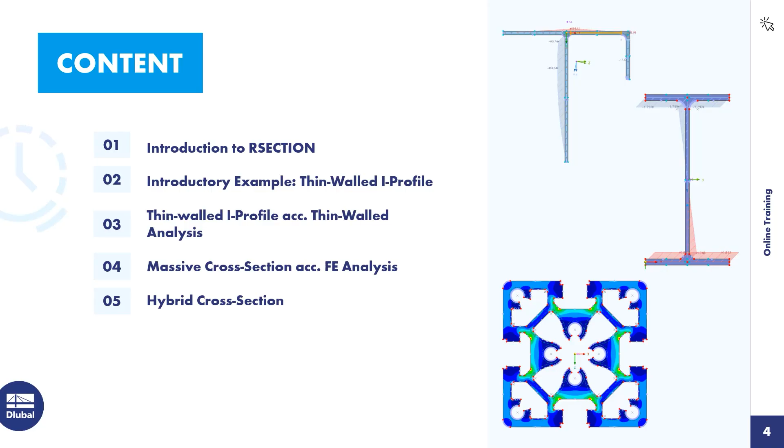Then I open RSECTION.

RSECTION is an independently executable program for generating any thin-walled or massive profile. If you want to design special profiles in RFEM or RStab that are not contained in the profile library, you can create them with RSECTION. You can then import these user-defined profiles into RFEM or RStab.

In RSECTION, it's possible to calculate cross-section values and stresses. The RSECTION user interface is the same as in RFEM 6 or RStab 9. The cross-section graphics and dialogues are displayed in the working window here in the middle. Most tasks can be performed with a mouse. In the tables below, the keyboard is primarily used for numeric input and output of results.

There are three navigators in the left pane of the working window: the navigator data, the navigator display, and the navigator results. The data navigator manages the input data. A double click on the corresponding entry opens the dialog in which the selected object can be changed.

However, it's also possible to create new objects via the navigator data. Just right-click on the object and choose, for example, new point, and then you can enter the point properties.

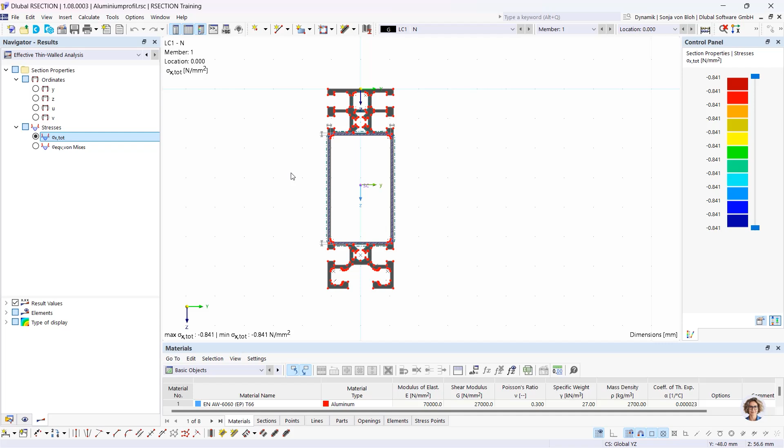Then I would like to go into the mouse function. To move the section, you can hold down the mouse wheel and move the section accordingly. You can turn the mouse wheel to zoom, and right-click to open the context menu.

You can also select objects with the mouse. If you open a window from left to right, everything that's completely within the selection area will be selected. If you drag a window from right to left, everything that is intersected by the selection area will be selected.

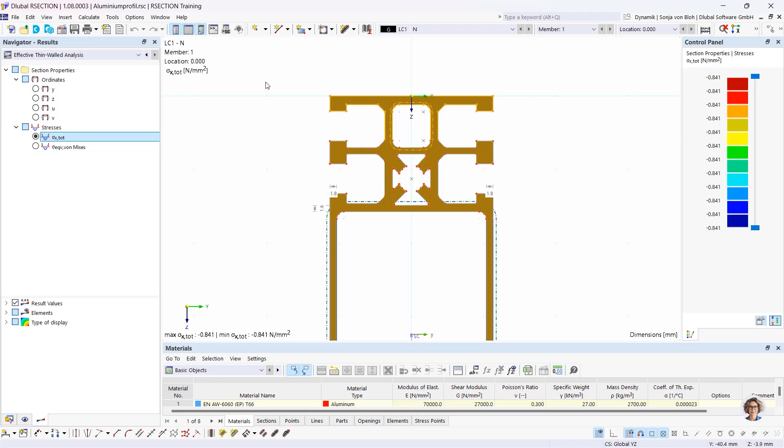You can also select individual objects. To do this, left-click on the objects that you want to select. If you want to add objects to the selection, hold down the Control key and then left-click on the corresponding objects. If you want to remove objects from the selection, hold down the Shift key and click on the objects.

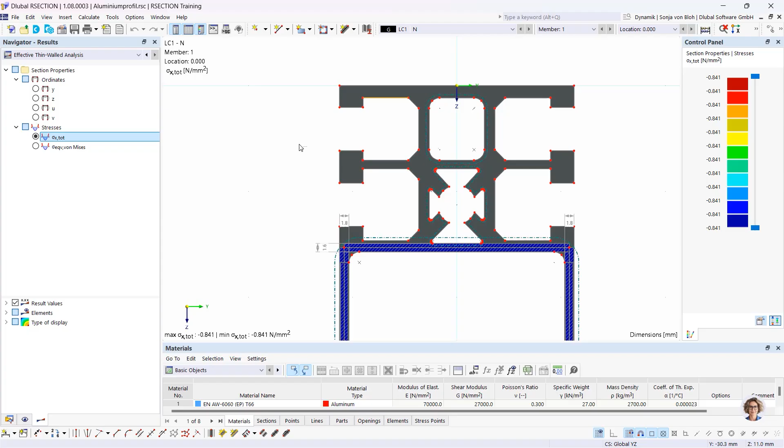This brings me to the first example. To create a custom profile, open the new model window via this button here. First, I have to enter the cross-section name. I name it example 1. Then I have to define the analysis method.

We have two analysis methods available: a finite element analysis and the thin wall analysis. I choose here the thin wall analysis.

It's also possible to calculate the effective cross-section. For this, it's necessary to activate this add-on. The effective cross-section can be calculated for both analysis methods. After activating this add-on, a standard must be selected according to whose rules the subpanels are to be generated and the effective cross-section is to be calculated.

The following standards are currently available: Eurocode 3 Part 1.1, Eurocode 3 Part 1.3 for cold formed cross-sections, and Eurocode 9 for aluminum cross-sections. I choose here the Eurocode 3 Part 1.1.

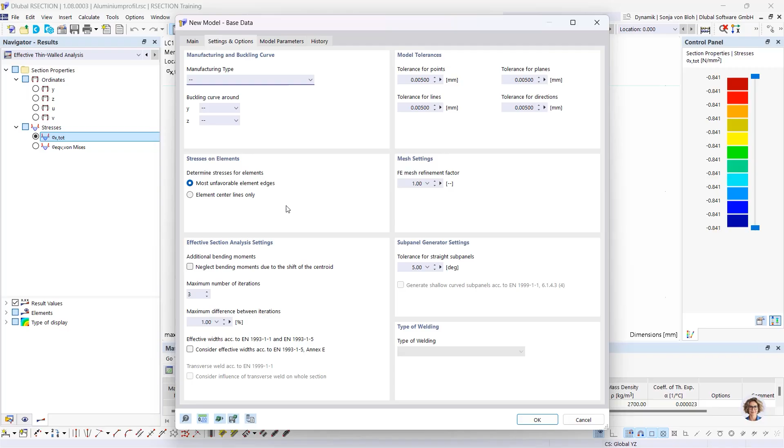I don't want to define here the manufacturing type, so I click on OK. Then the new file will be created.

I first define the material. A material is already defined, so I double click on this material to open the Edit Material dialog. Here in the list on the left, it's possible to add a new material. It's also possible to copy a selected material or to delete a material.

It's possible to enter the material name directly here in this field. Here I enter, for example, an S235, and now RSECTION lists all materials that match that name.

But I can also open the material library via this button here for a specific selection. The material library filters are available to quickly find the material. You can filter here, for example, by material name, steel, for example, and you can filter by a standard.

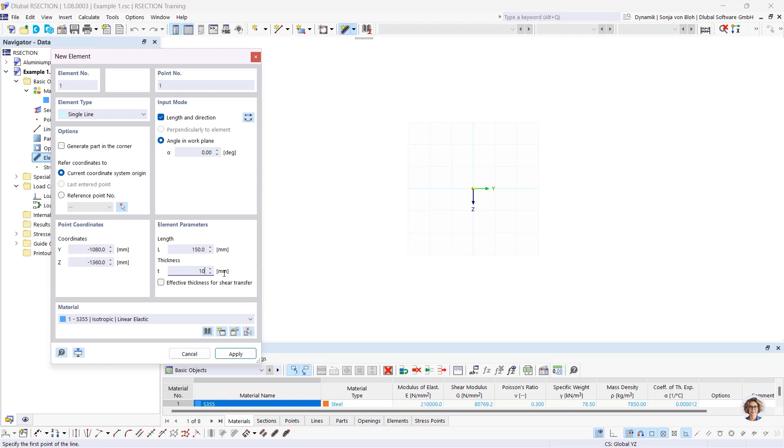I'll enter the bottom flange here first. The bottom flange has a length of 150 millimeters and a thickness of 10.7 millimeter. You can see here a preview of the element, and to create the element, I choose the desired location, and then I left click with my mouse.

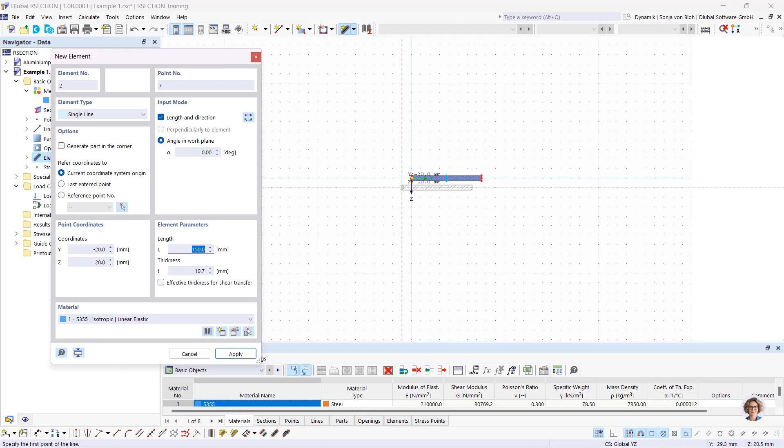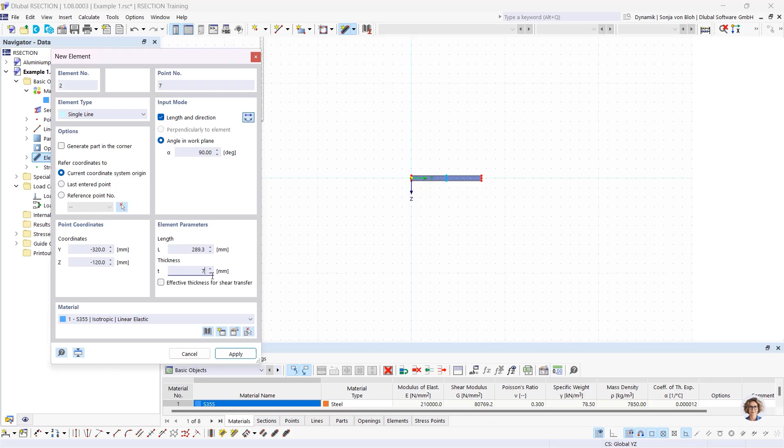Then I define the web. For this I reverse here the orientation, and the web has an angle in the work plane of about 90 degrees and a length of about 289.3 millimeters and a thickness of 7.1 millimeter. And then I put this web here in the middle of the first element.

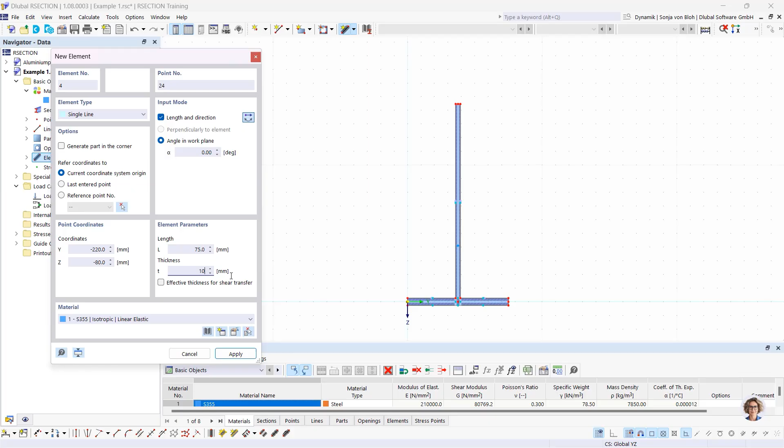Then I create here the upper flange. So I define an angle in the work plane of 0 degree. Length is 75 millimeter. Thickness is 10.7 millimeter. And I choose here this point. Then I reverse the orientation to create the second part, and then I place this here, and with a right mouse click I leave the window.

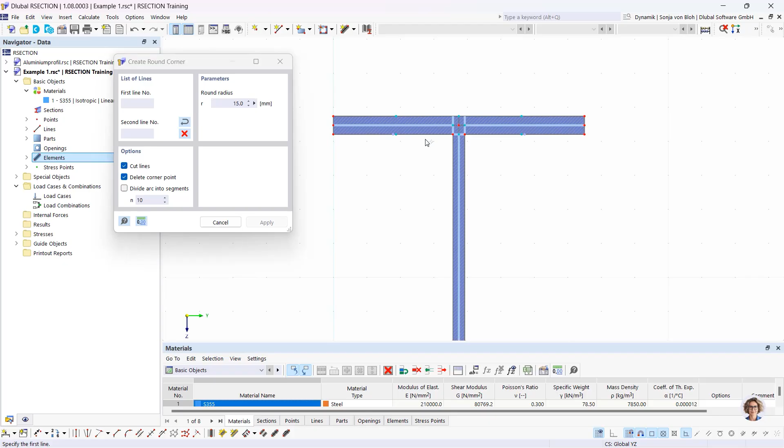The profile should be a rolled T profile to which a lower flange is welded. I want to also define here the round radius. So I can define lines to create this round radius, or we have also a function called create round corner, and you find the corresponding button at the bottom. Then you have to define the round radius. This should be 15 millimeters, and all I have to do is click on the relevant lines. Right mouse click to leave the dialog.

Then I want to define the welds. The lower flange is welded with a 6 millimeter double fillet weld, and I create the welds using the create angled corner function. Here you have two corner types. You can define the corner via both edges or via edges and angle, and I choose edge and angle.

It's also possible to calculate in the dialogues, so I define here for the length 6 multiplied by square root of 2, and then I have to define the angle. It's 45 degrees, and click on the relevant lines.

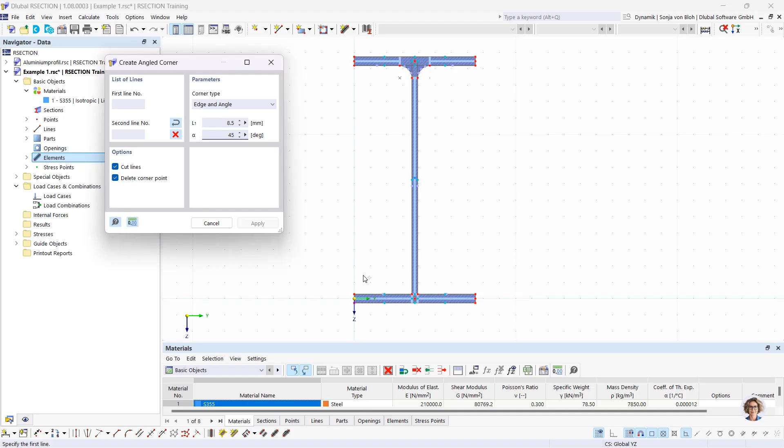What you can now see here, these are the subpanels, and these subpanels are automatically generated based on the standard selected in the base data. If no elements are defined, a cross-section classification in RSECTION and in the design modules of RFEM or RSTAB is not possible.

And neither a calculation of the effective cross-section is possible. In the design add-ons, this profile is then designed according to cross-section class 3. I would also like to use this example to show you how to calculate stresses and the effective cross-section.

In order to calculate stresses or the effective cross-section, a load case must first be created. Load combinations can also be formed.

So I create a load case first via the navigator data. Here I go to load case, new load case. I name this load case N, and I want an additional load case, so I create a new one and name it MY.

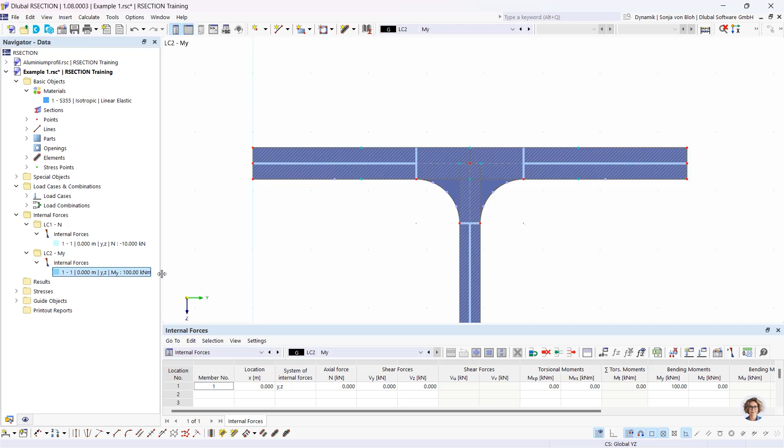The dots that you see now in the graphics are the stress points. Stresses are calculated and displayed at the stress points. The stress points are generated automatically, but I can also define them manually.

I want to define the stress points manually, so I go to the navigator data and open the stress points. These are the automatically generated stress points, and I want to add a new one, so I choose this option. The stress point should have the number 100, and then I have to define the coordinates.

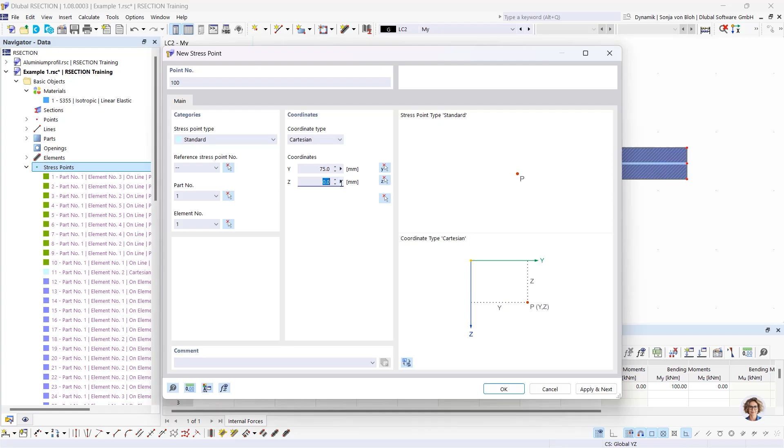I can define the coordinates manually, or I can select a point in the graphics and import its coordinates. I want to define it manually: 75 millimeter and minus 100 millimeter. Then I click OK.

Now the stress point is created. We can see the stress point here in the graphics. It's also possible to show the numbering. For this, I go to the navigator display and activate this checkbox for numbering, and we also have a checkbox for the stress points. Now you see the stress point number 100.

I deactivate this again. Which stresses are to be calculated and output in tabular and graphical form can be set in the stress configuration. I want to show you this now. For this, I go to the navigator data, and under stresses, stress configuration, I find the stress configuration. The corresponding control fields are to be activated or deactivated here.

Now only sigma x total, tau total, and equivalent stress will be calculated. That's okay in this case. So I start the calculation now.

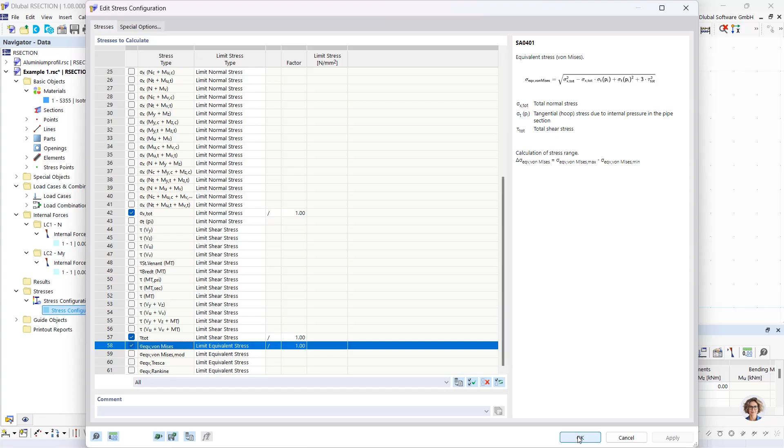In the results navigator, you can switch between the results of the gross cross-section, which are the thin-walled analysis results, and the results of the effective thin-walled analysis calculation. I show here the results of the gross cross-section first.

The same possibilities are included in the tables. Here you can switch between the results of the gross cross-section and the effective cross-section. I choose here the results of the gross cross-section.

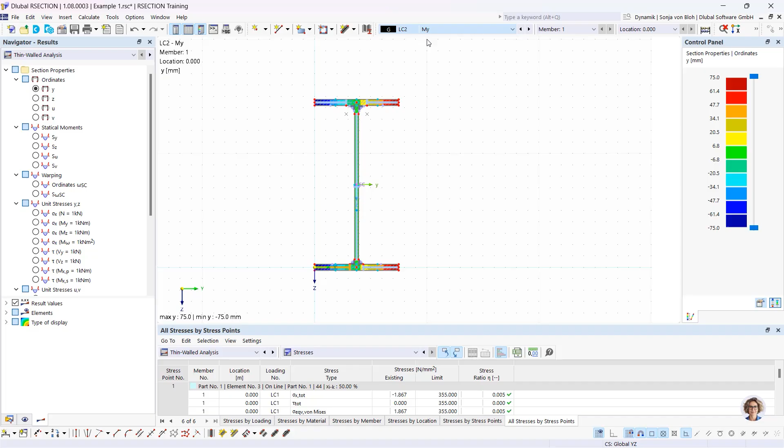It's also possible to switch between the results of the load cases and the load combination. I look at load case 1 first, and I want to see the stresses for load case number 1 for my axial force. It's also possible to change the type of display.

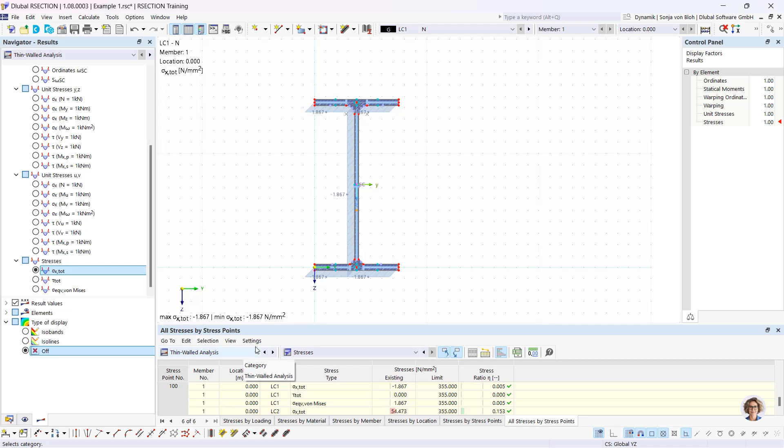I choose here off. And if you want to see the stresses on the stress points that we created, you can go to this table, open the tab all stresses by stress points, and if you choose this stress point, you go directly to the stress point in the table.

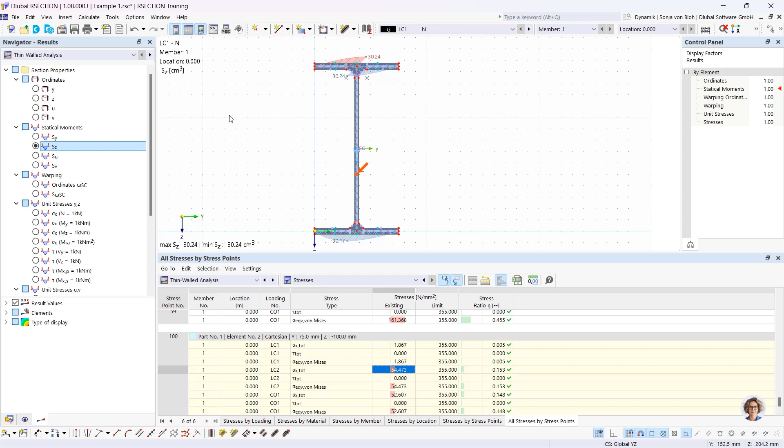It's also possible to show the statical moments as Sy, Sz and so on. We have the statical moments also in the table. Here, statical moments and warping.

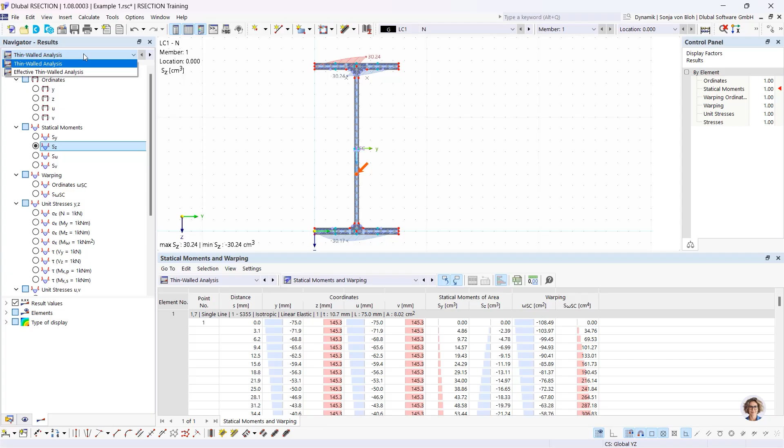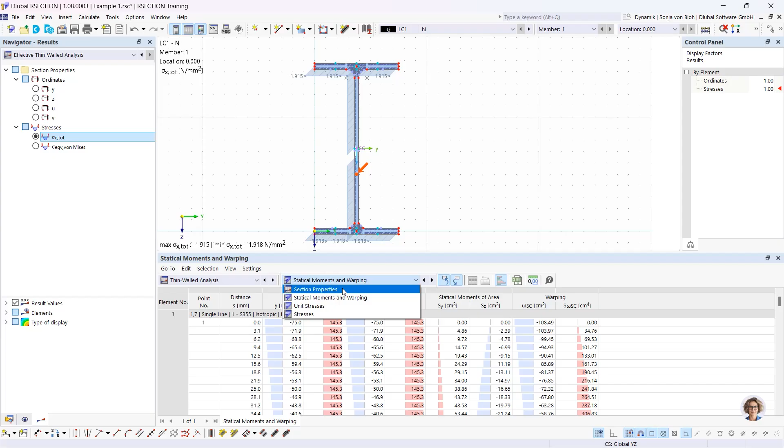I want to go to the effective cross-section results now. So I change here in the navigator results to effective thin-walled analysis, and I want to see here the stresses for load case number 1. I change this here also in the table. You see here the section property of the effective cross-section in comparison to the section properties of the gross cross-section. The section property of the effective cross-section are reduced.

You can see here graphically that in load case number 1, the web falls into cross-section class 4. Local buckling occurs in class 4 cross-section. According to the standard, the reduction in strength due to local buckling can be taken into account through effective widths, and this is calculated automatically here in RSECTION.

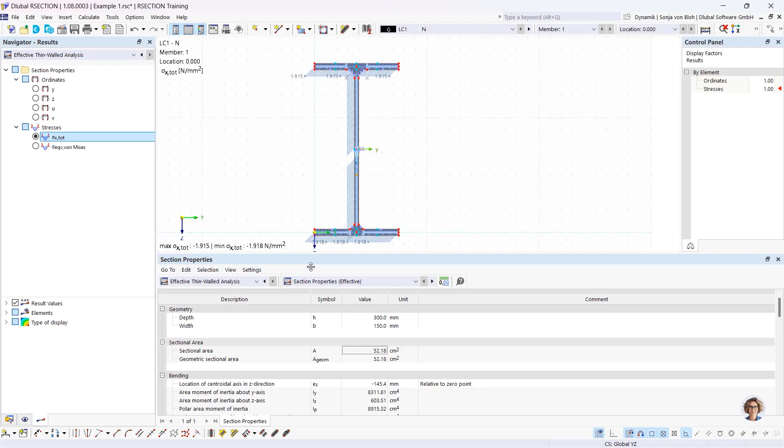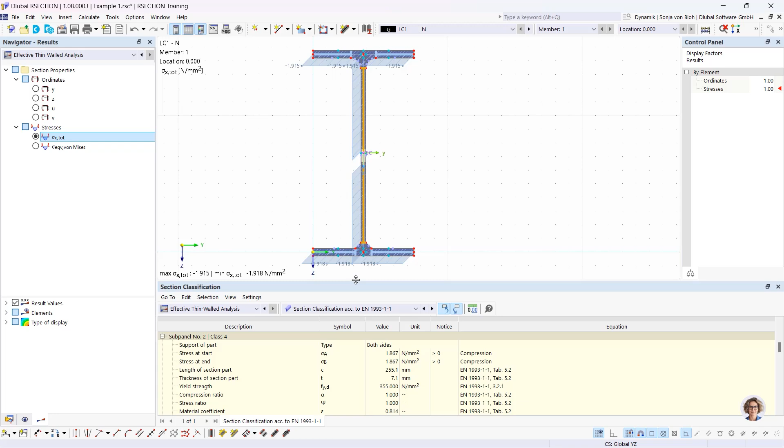You can see here the section classification also in the table. You see here, okay, classification, this cross-section falls into class 4. And if you click on the subpanel of the web, you see here the details of the classification. It's also possible to see here the effective width of this subpanel.

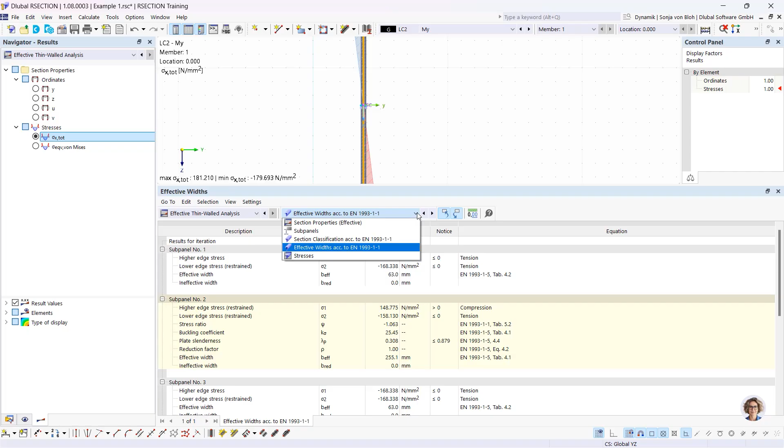Here if I switch to the bending moment and go here to the section classification, you can see this cross-section falls into class 1, so no reduction has to be made. And for the combination, I see that this cross-section falls also in class 1.

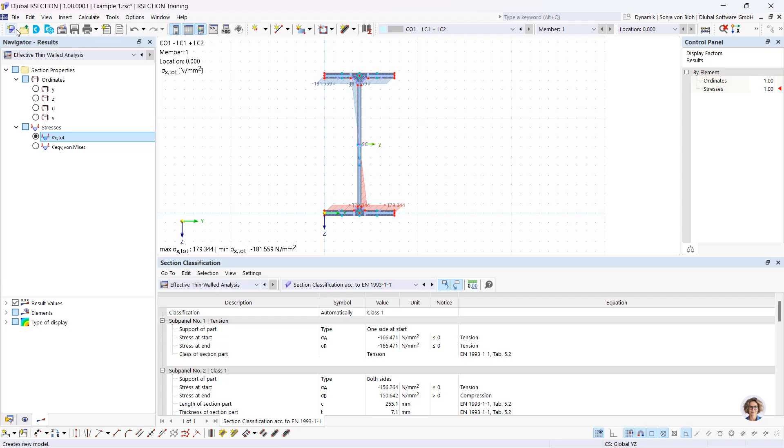I would now like to use another example to show you how you can access cross-sections from the library and modify them. For this, I create a new file via this button. I call it example 2. Here I choose the analysis method thin-walled analysis, and I want to calculate also the effective cross-section. So I activate this checkbox and I choose the standard Eurocode 3 part 1-1. And then I click on OK to create this file.

I then define the material. This should be in S235. So I open here the material library. I type the material name S235 from this standard. OK.

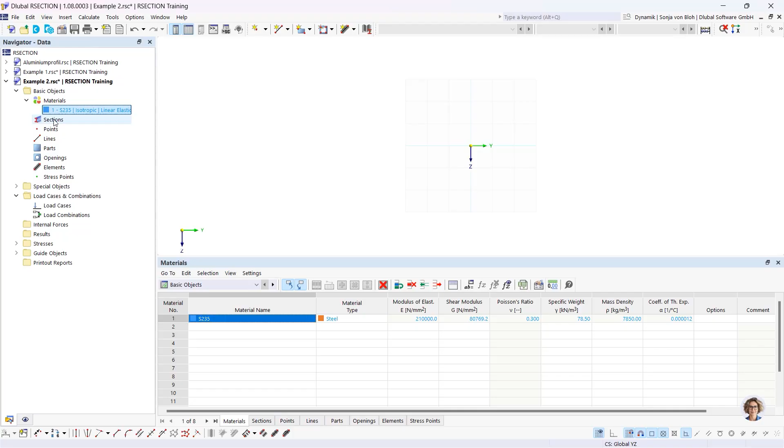And then I insert a cross-section from the cross-section library. To do this, I go here to the navigator data and open here the window new section. The window is structured like the material window. A cross-section can be created or copied via the list here, via these buttons. I can enter also here the cross-section name, for example, IPE 200.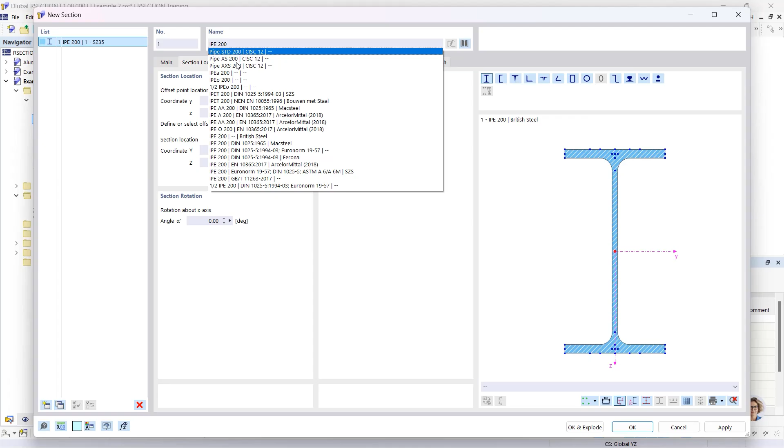But it's also possible to open the cross-section library via this button. A large number of profiles have already been entered into the profile library, and I want to choose here a standardized L profile, and the name is L200 150 12. I choose here the standard, then I click on OK.

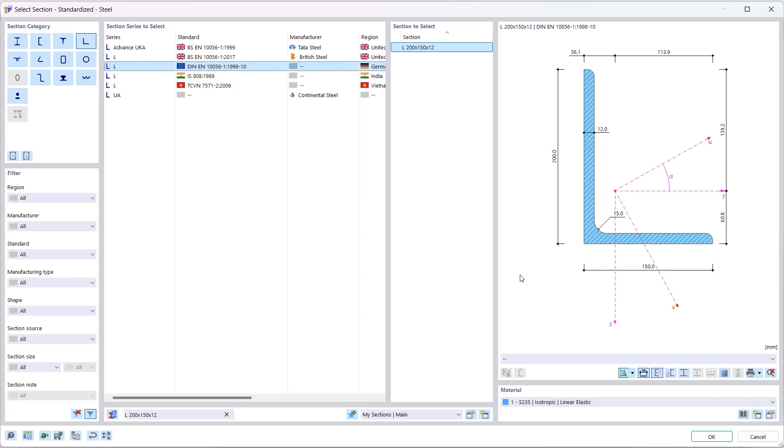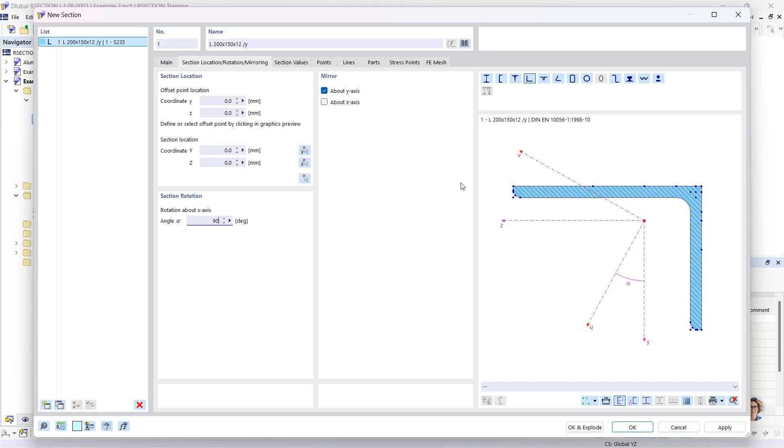The angle should be mirrored around the y-axis, so I activate this checkbox, and the angle should be also rotated about the x-axis, about 90 degrees. Furthermore, I select the offset point in the graphic, and at this point the profile is placed at the insertion point. I pick for this point here, and then I define the insertion point. I can pick this also graphically here in the working window, and then I click on OK.

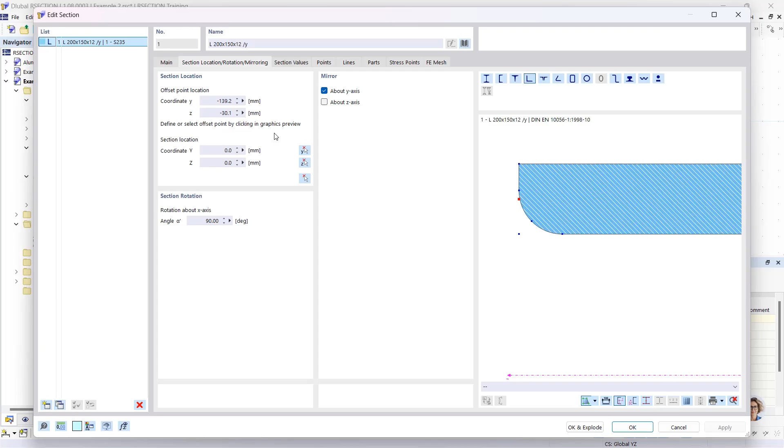When inserting this thin-walled cross-section, two elements are defined and one part will be created. The cross-section can be subsequently edited, moved, mirrored, or rotated. You can open here this dialog, or you can use here this function for move, copy, or rotate and so on. However, in order to modify individual objects such as points or lines, the cross-section must be split. The cross-section is to be supplemented by further cross-section parts.

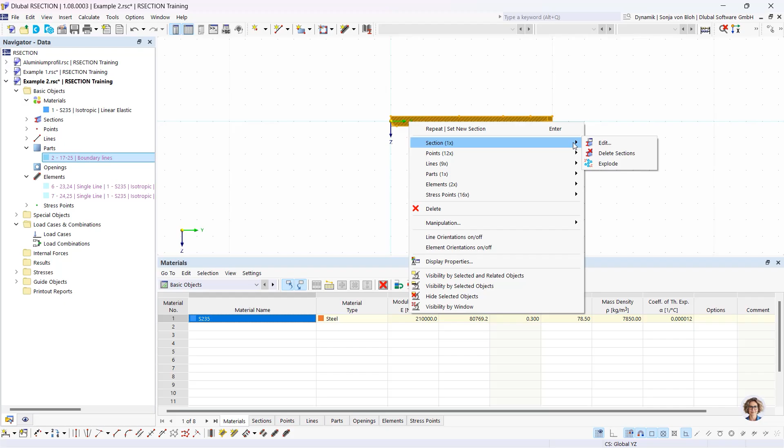I therefore split the cross-section into its individual parts for further processing. To do this, I right-click on this section, and then I choose here Explode. The fillet isn't needed, so I delete this. So I choose here this point and click on delete. Now the part is deleted too.

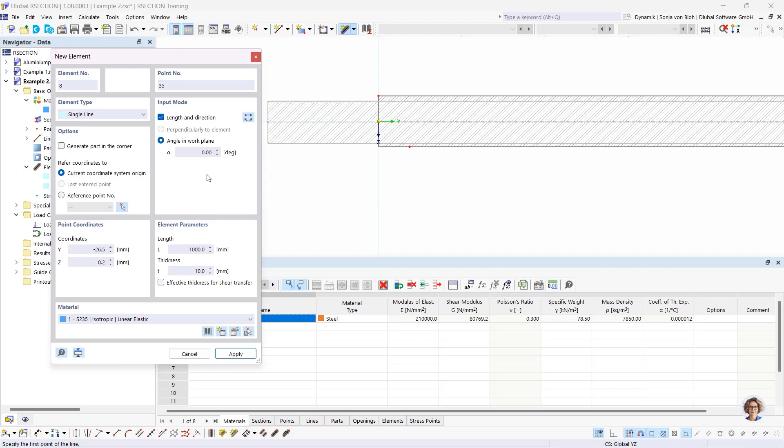I also add more elements. I insert an element with a thickness of 12 millimeter and a length of 200 millimeter, and I will do this via the graphical input. Here I choose single. I choose the input mode length and direction, and I reverse the orientation, and the length should be 200 millimeter, thickness is 12 millimeter, and then I put this element here.

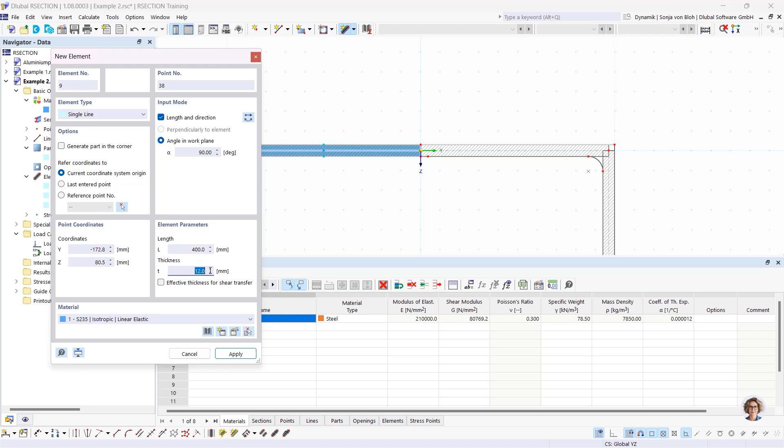I want to add another element for the web with a thickness of 10 millimeter and a length of 400 millimeter. For this, I define here an angle on the work plane. I have to reverse the orientation. Length should be 400 millimeter, thickness 10 millimeter, and I create this element on this position.

I now delete unnecessary lines. I don't need this line, and I also don't need this line. And welding seams should also be taken into account.

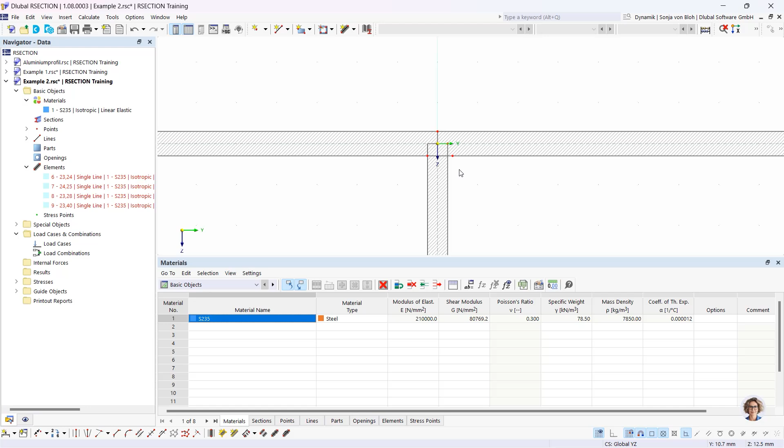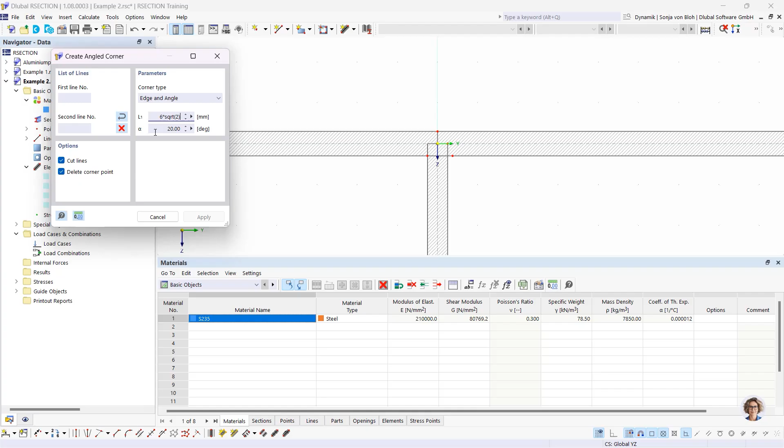So I create the welds using the function create angled corner. Here I use the corner type edge and angle, and a double fillet weld is to be defined, so that I define here 6 multiplied by square root of 2 with an angle of 45 degrees. And I define it here on these positions.

Furthermore, I still have to create the part by selecting here this function select boundary. Here I have to choose the material, and then I click on the line, and now the part is created automatically.

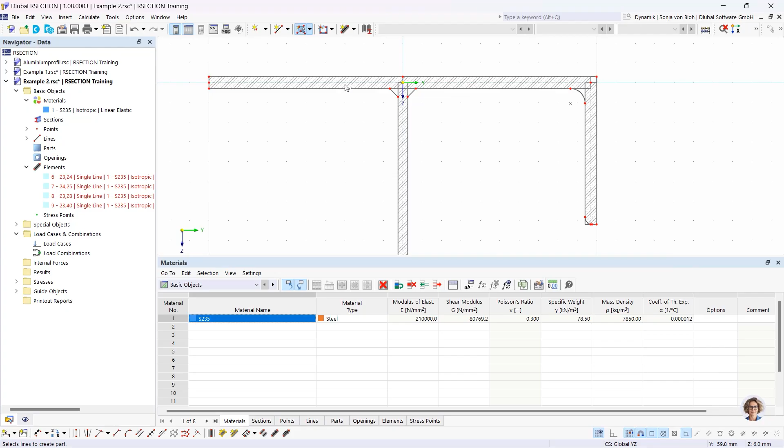I would now like to calculate the effective cross-section and the stresses, so that I create a new load case. So for this I create a new load case. I call this load case N, and a second load case My. I want to create also a load combination with N plus My, and I click on OK.

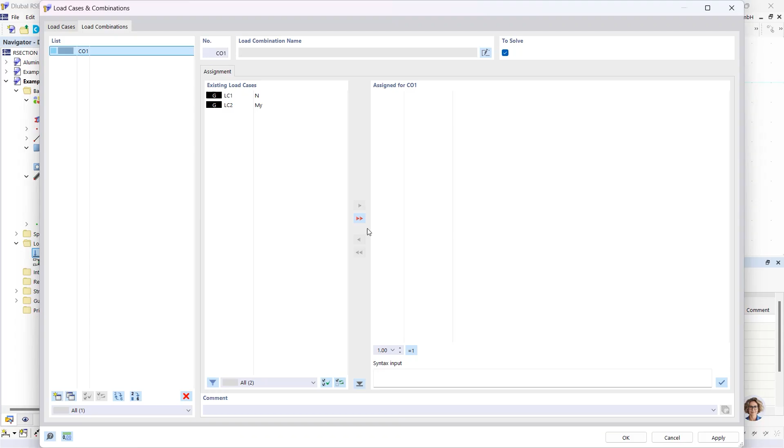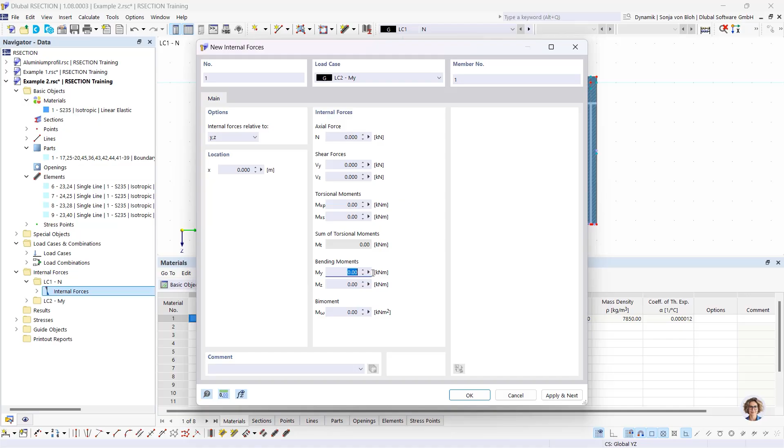Then I have to define the internal forces. For this I open here the internal forces, and in load case number 1 I create an internal force of -50 kilonewton, apply, next, change the load case. Here axial force should be 0 and My should be 20 kilonewton meter. Then I click on OK. I start the calculation now.

I look at the effective result of the effective cross section. For load case number 1, I see a reduction in the web and in the flange. Looking at the section classification, you can see this cross section falls into class 4 for load case number 1, and also for load case number 2, but here only the flange is reduced.

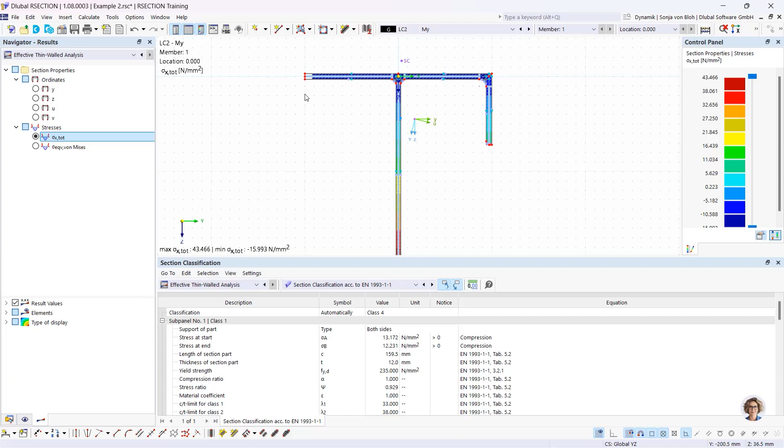We can change the type of display to off, and then we look to the classification of the load combination, and also for the load combination this cross section falls into class 4.

I want to create the documentation now, and this is done in the printout report. For this I go to the navigator data again, and here I create the new printout report.

Here I can choose the report items that should be included in the printout report. I don't want to have the stresses by loading and material and so on. So I click now on Save and Show.

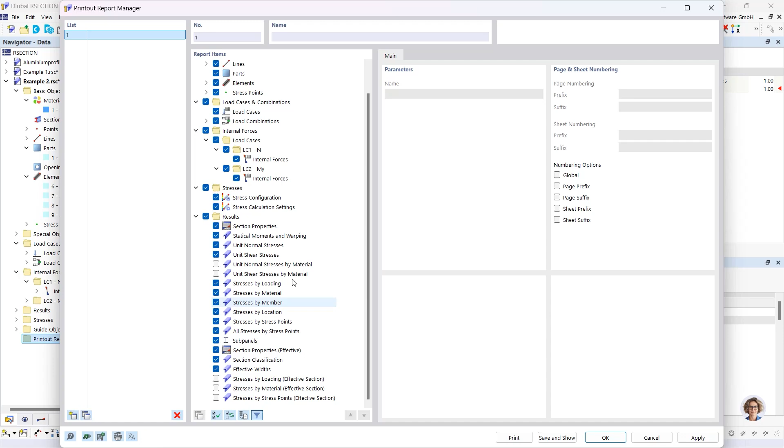Now the printout is created. We have here the tables that we have chosen in this printout report manager, and it's also possible to print a graphic to this printout report.

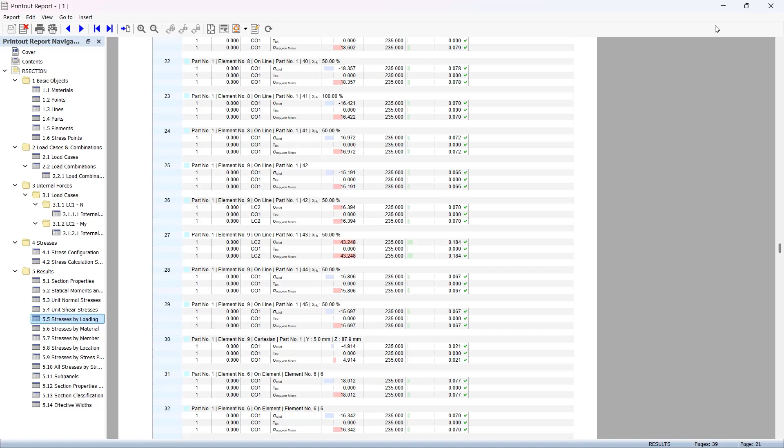I want to show you this now. To print this graphic to the printout report, I choose this function: print graphics to the printout report. Here you have the possibility to make various settings. You can define the graphic printed so that it's window filling, and you see this in the preview.

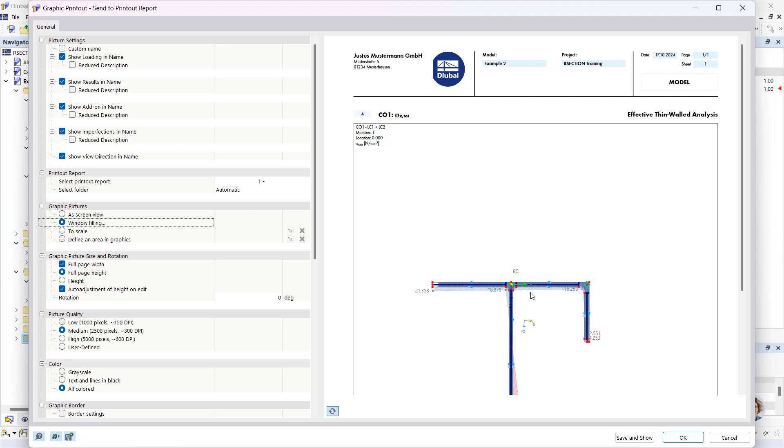Then I go to save and show, and now this graphic is printed to the printout report.

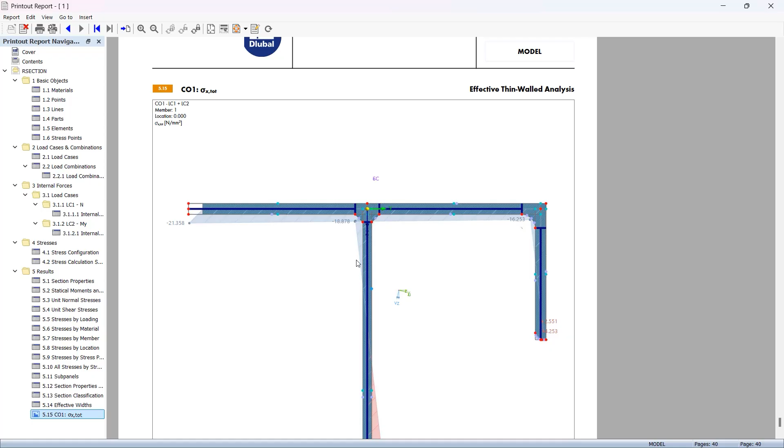In the next example, I would like to show you that you can also create cross-sections by importing a DXF file. Now I close this printout.

A DXF file can be imported via menu File, Import DXF. Then I choose the corresponding DXF file and click on Open. I don't want to import this DXF file into the active model. I want to create a new model, so I click on No.

In the section Create RSECTION Model, you have 3 options for creating the cross-section. The automatic creation of elements is useful if the outlines of the cross-section are available in the DXF file. RSECTION attempts to create center lines for parallel lines and then set the elements between the intersections. Only elements that do not exceed the maximum thickness defined in this maximum thickness field are created.

The import function use DXF template lines as center lines is useful if the cross-section geometry is available as a center line model. The lines of the DXF template are considered as the center lines of the elements. The thickness defined here in this field T is assigned equally to all elements.

The function create DXF template is useful for massive cross-sections where no elements need to be created. In addition, this function can also be used for complex cross-sections where I only want to create elements for the decisive cross-section parts. With this import function, the lines in the DXF file are imported as lines.

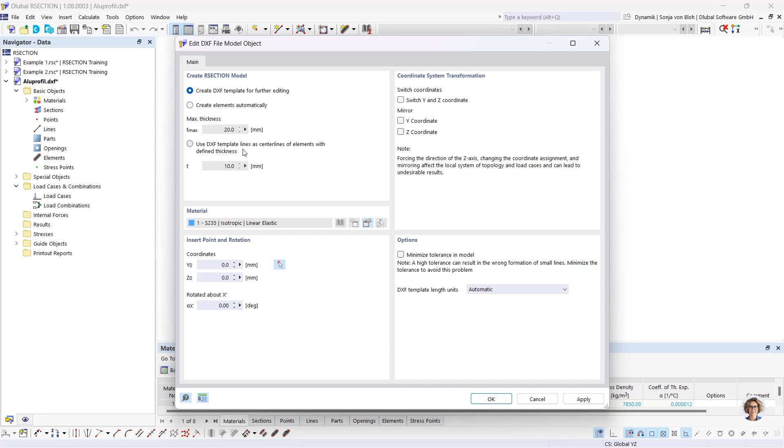You can then use these lines as an aid for modeling. I use this function today, so I click on OK. Now the lines are created.

A finite element analysis is to be carried out on the imported profile. I set this in the base data. For this, I open the base data. This is already chosen.

A finite element analysis should be performed on massive cross-sections, such as timber cross-sections or concrete cross-sections, in contrast to thin-walled cross-sections, where the stresses can be regarded as constant across a cross-section thickness. The stress distribution in solid cross-sections is variable. This can only be determined with a finite element analysis. So I click on OK.

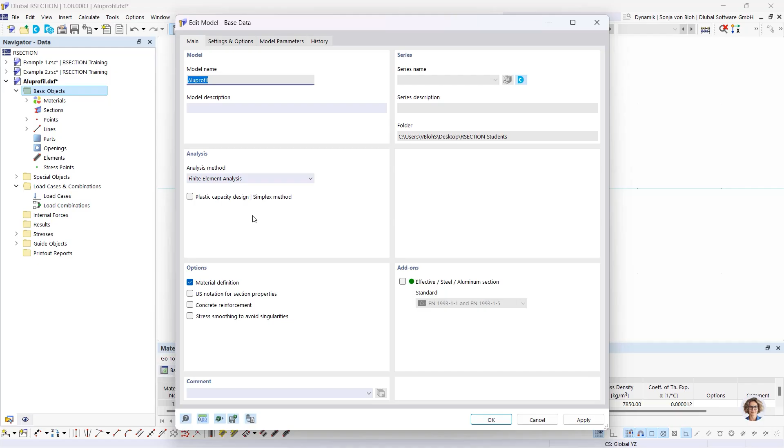Then I have to define the material. This should be an aluminum material, so I modify this material. I open the material database. I choose the filter aluminum, and this should be a 6060 aluminum material. Here, this material, OK, and then OK.

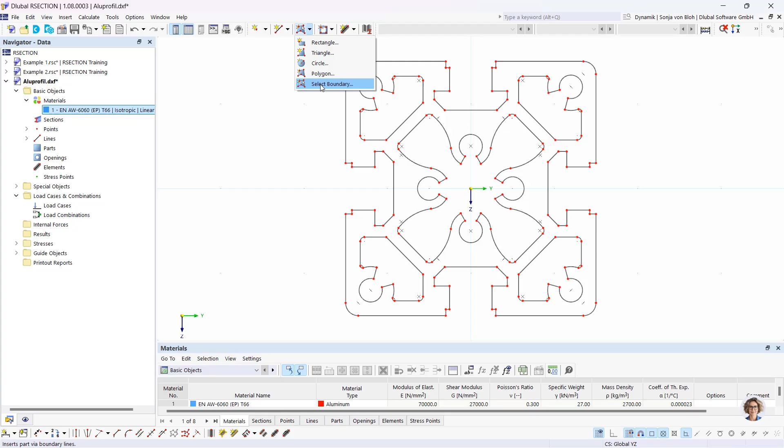In a finite element analysis, only a surface needs to be defined, but no elements need to be defined. I would only have to define elements if I also want to calculate the effective cross-section or carry out a classification. So I only have to create a part here, and I create this part via the function select boundary. Then I click on the outline and the part is now created. After creating the part, I still need to create the openings.

For this, I use the function select boundary for openings, and then I click on the relevant line.

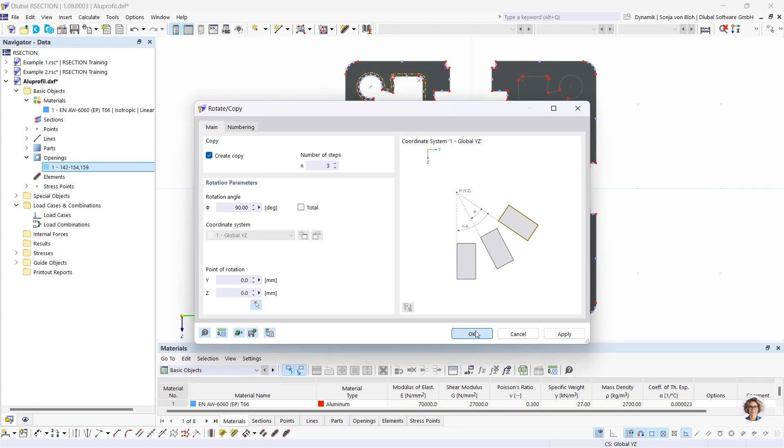I want to show you that you can also create openings by rotating them. So I select this opening, open the function rotate selected objects, and create 3 copies. The rotation angle is 90 degrees, and the point of rotation is here in the middle. I click OK, and now the openings are created.

I still need an opening here in the middle, so I use the select boundary function again. And now the cross-section is complete. I want to calculate the stresses here as well.

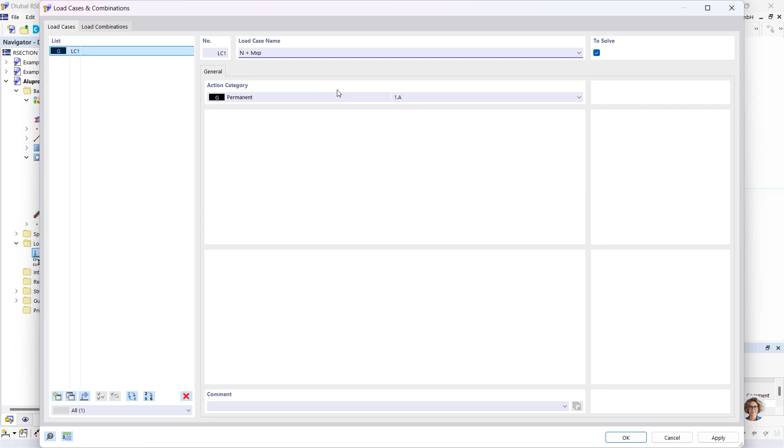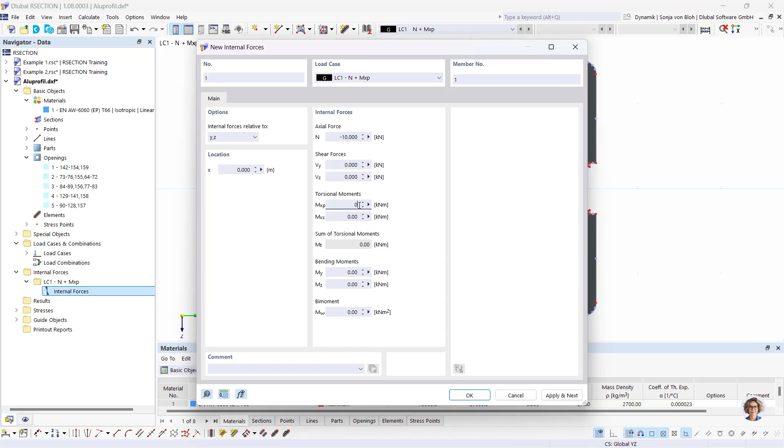So I create a new load case and name it N plus MxP, then click OK. Then I define the internal forces in the load case: an axial force of minus 10 kilonewton and a torsional moment of 0.3 kilonewton meter. And I click OK.

Then I start the calculation, and now I look at the results. I want to see the stresses sigma x, the shear stresses, and also the equivalent stress sigma.

I want to create a printout and include this graphic as well. So I create a printout first. I go to the navigator data, right click on printout, new printout, and select the relevant items.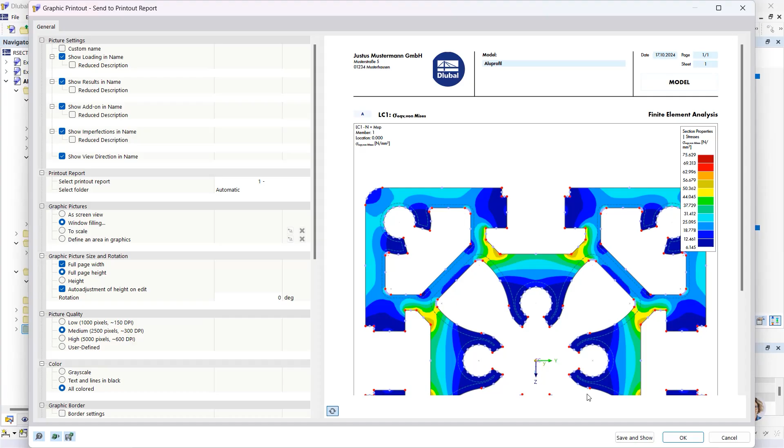Then I click on save and show. I want to add this result graphic to the printout report, so I choose print graphics to the printout report. Save and show. And now this graphic is also printed to the printout report.

As a last example, I show the modeling of a composite cross-section. In RSECTION, it's also possible to model cross-sections that consist of different materials. Ideal cross-section values are determined for such a cross-section.

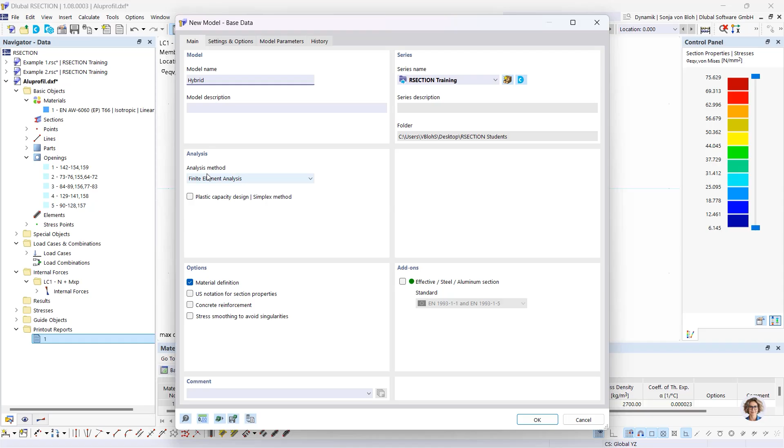For this, I create a new file and name it hybrid. A 1000 millimeter wide and 200 millimeter high concrete cross-section lying on an HEB steel cross-section is to be modeled. I choose the analysis method finite element analysis, then click OK.

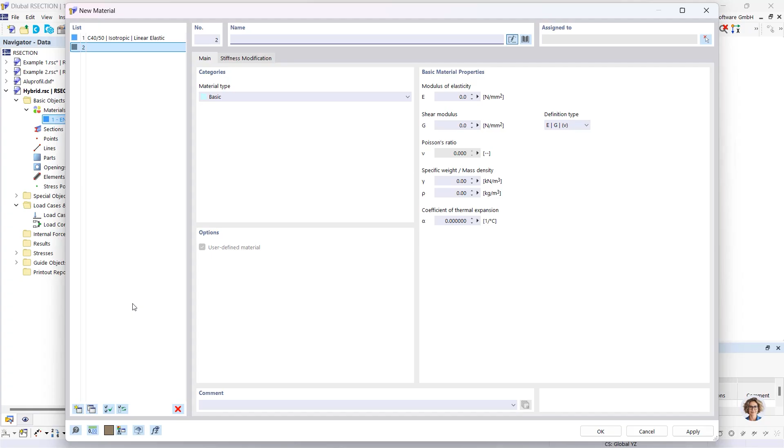I define 2 materials. For this, I open the edit material dialog. First, I define the material for the concrete part: I open the material library and search for C40/50 from the standard. Then I need an additional material for the steel cross section, so I create a new material, open the material library, and choose S235. Then I click OK and OK.

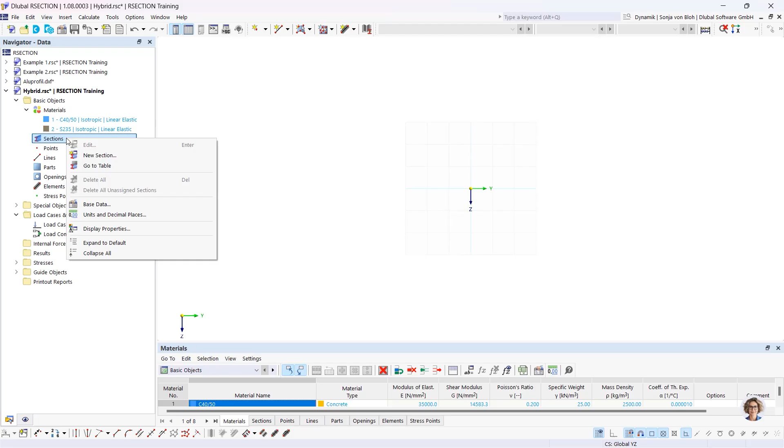First, I model the concrete cross section. For this, I use a cross section from the library, so I choose new section. Geometry B is 1000 millimeter, H is 200 millimeter, and then I click OK.

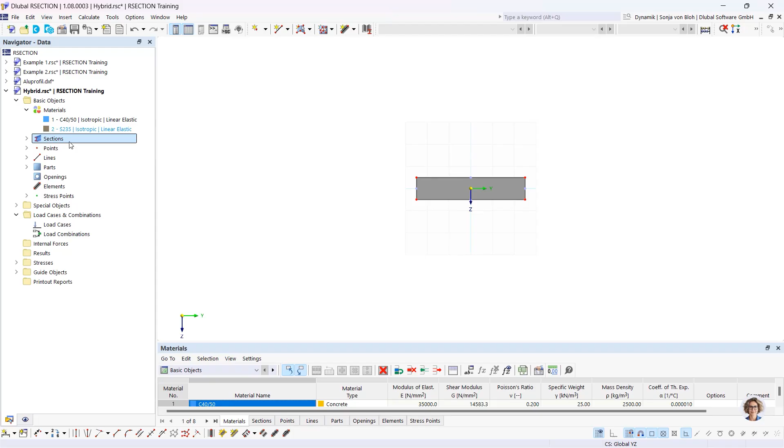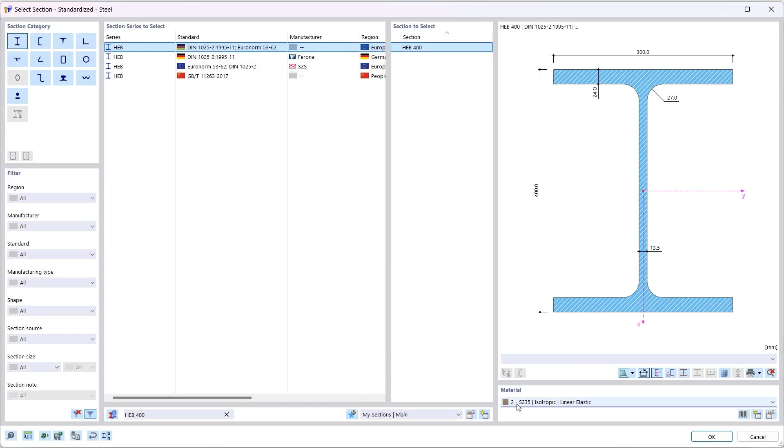Then I create my steel cross section, which is also included in the section library. I create a new section, open the section library, open the I-beams, and look for an HEB 400, with material S235 for this cross section. I choose the center of the top flange as the offset point, and the bottom of the concrete cross section as the insertion point. Then I click OK.

I now create a load case because I want to also calculate the stresses. So new load case, I name it M. In this load case, I define my internal forces as a bending moment only, My equals 100 kilonewton meter.

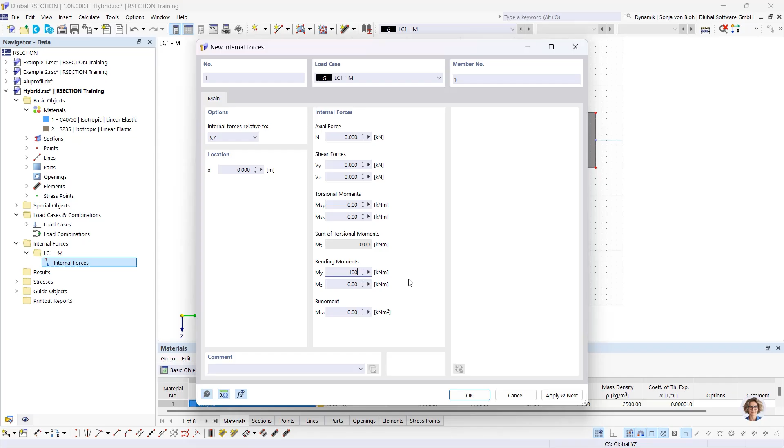I start the calculation now, and here the stresses are calculated, along with section properties and so on.

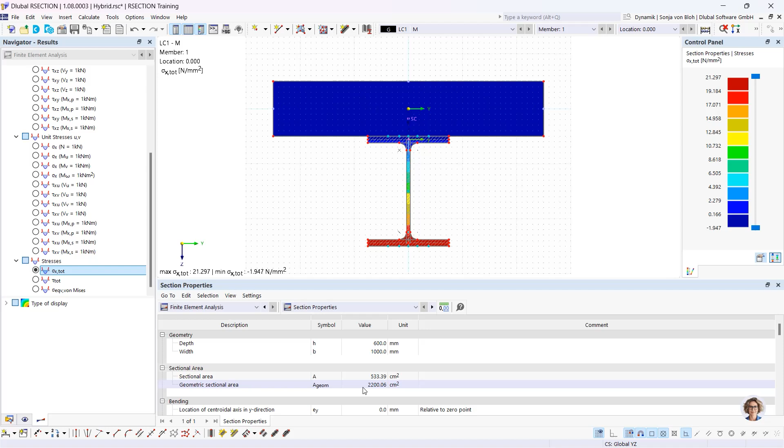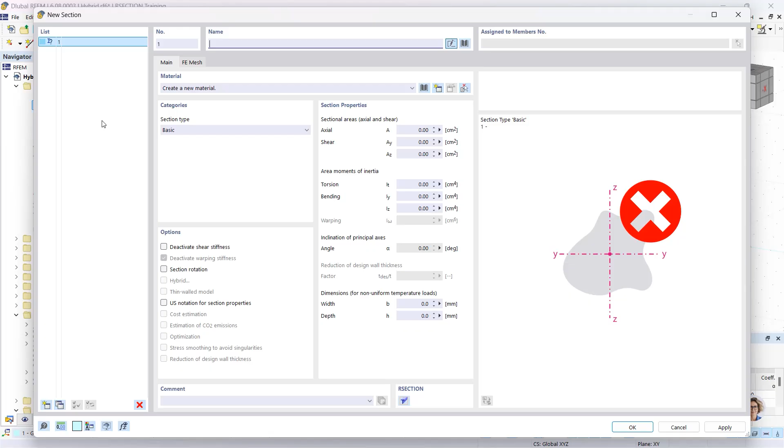I would also like to show you how to import the cross-section into RFEM. To do this, I save the cross-section first, then open RFEM. I've already created a file. Then I have to import this cross-section: I go to the navigator data, sections, new section, open the cross-section library, section from RSECTION, and choose this hybrid cross-section.

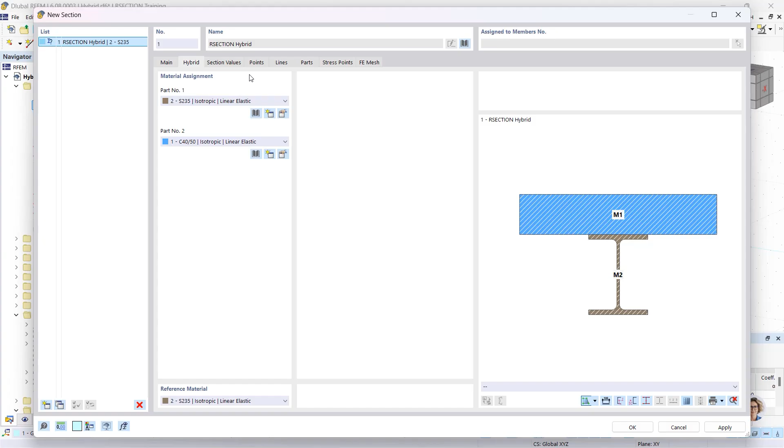You see now the option hybrid is activated. There is also a tab for material assignment, where I can see which materials are assigned to the cross-section parts, including the reference material. It's also possible to define a different material here. Then I click OK, and I can use this cross-section.

I can create a new member with this cross-section, and I can use this in my static analysis.

With this example, I have come to the end of the training. It was taught how you can create general cross-sections with graphic functions, how you can add cross-section parts to database profiles, and create profiles based on a DXF import.